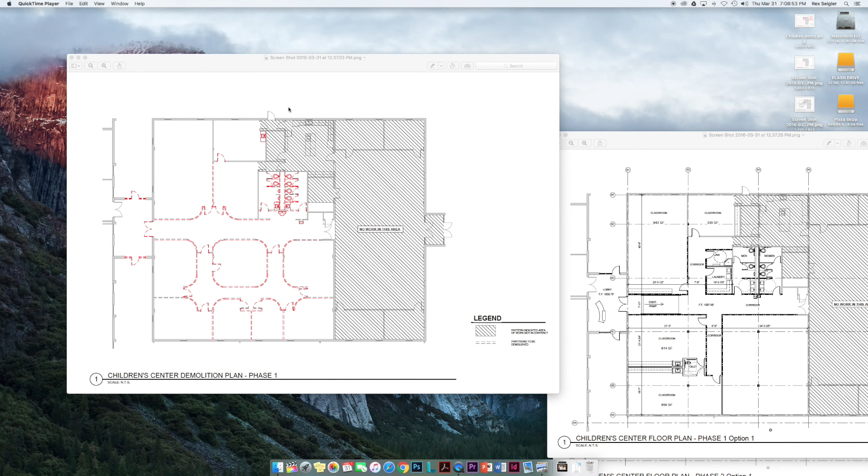They're as they are. Okay, so I'll bring this over, and this will show you—this plan shows what the intended floor plan is to look like.

Now, this area right here is the actual breezeway that is in between the two buildings right now, with this door providing out into the playground area, and this door comes to a sidewalk which comes along this side to the circular driveway and the sanctuary side.

So this is the planned entry point for the nursery after hours, or for Mother's Day Out and other events using the nursery, so that they can come up in the circular driveway and enter between the buildings and come in this place here for a secure checkpoint.

This is our existing ramp going down the corridor toward the gymnasium area. There will be some changes to the angle of the ramp, but with the new floor plan, you'll see this is a much larger room with squared off corners.

We'll have a short corridor going back this way, giving access to a janitor's closet, a laundry section area, and a smaller classroom in this area.

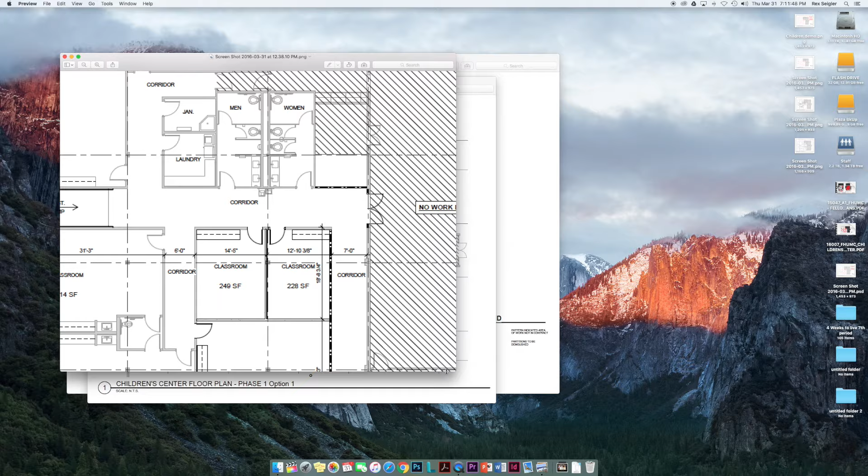And you'll see this document actually shows how that space is going to be used. Let me make this a little bit bigger. Guess that's not going to work. Try it anyway.

That space will be used to rough out two classrooms with a dividing wall and a larger classroom, and there will be a corridor along this wall to provide egress outside for emergencies, and to the driveway and access across to the sanctuary if needed.

But the actual exit point that is secure will be this point right over here. This will just be an emergency exit, as well as there will be emergency doors going through the gym this way. But this will be a secure point where people cannot come back through this way.

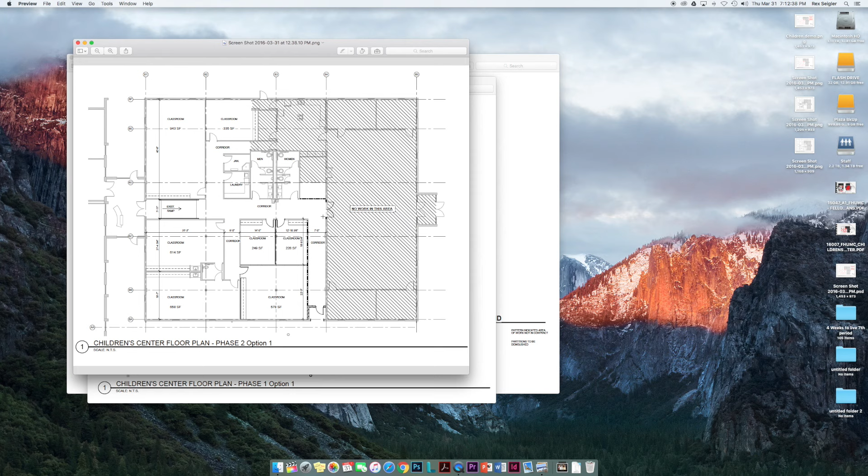Bringing in new members, bringing in young families, and also reaching out to multi-generational families. So I think from the standpoint of the improvements in the fellowship hall, that'll be a great way to fellowship and to reach those multiple generations of families. It's very important that that happens.

Proposed renovations to the fellowship hall will begin with some demolition on the 10th Street side. The stairs and doors will be removed, as well as the large storage room in the corner.

This will allow for construction of a ramp for accessibility to the room from the lobby area, which we now refer to as the parlor.

In that wall where the 3 doors were, 3 windows will be placed in the wall separating the old entryway and the fellowship hall. This will allow natural light to enter the room.

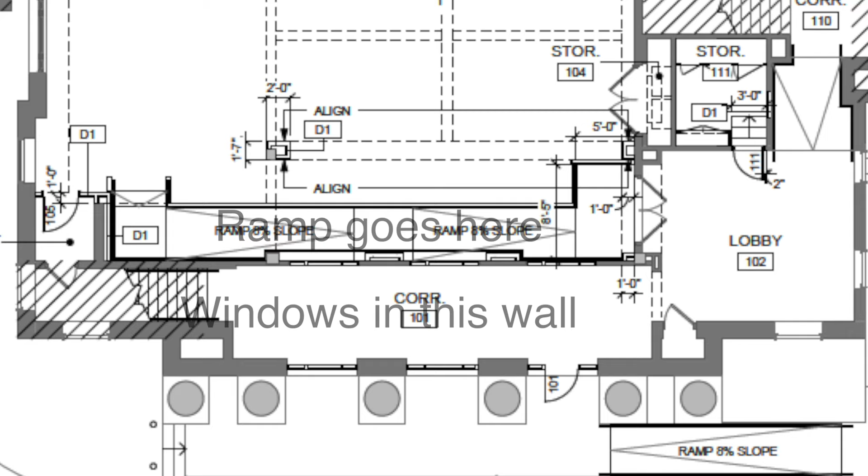The exterior doors between the columns will be removed and replaced with 2 windows and 1 large door for an emergency exit. This will improve the appearance on the outside and make it look like it's not an entrance.

We will also have to remove some stairs on the front steps to provide a ramp to the sidewalk level.

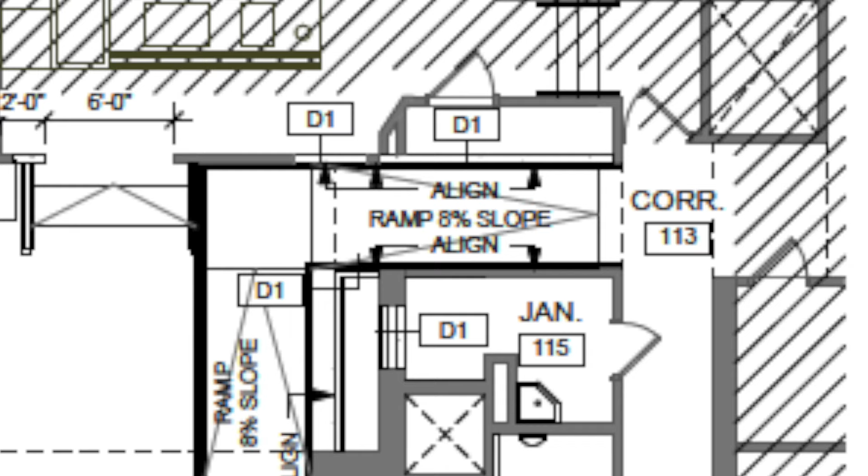Moving to the kitchen side of the fellowship hall, the current entry ramp and part of the kitchen ramp will have to be demolished to make room for a wider, longer ramp. Several other storage and mechanical spaces will have to be modified as well.

The doorways to the serving lines will have to be enlarged. Other sections of demolition would include creating an additional entry or exit into the Merle Anthony classroom and expanding the existing doorway to provide better access.

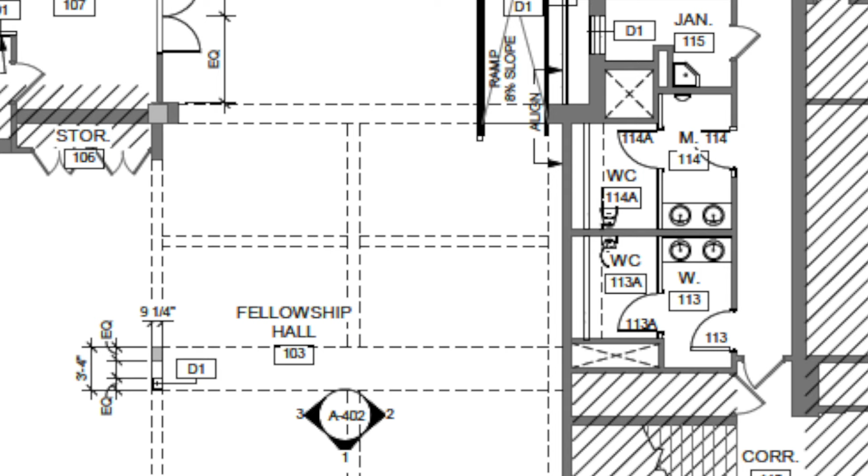The restrooms in the Fellowship Hall corridor will have to undergo major renovations to bring them up to code. And it is true that we will lose some stall space, but what we lose in space, we will gain in accessibility.

Also, cosmetic changes. The ceiling of the Fellowship Hall will be altered to have a level appearance instead of the various canted angles that are left over from the old sanctuary above.

There is an estimated $25,000 for new kitchen appliances. Although the kitchen itself is not presented at this time for a complete overhaul, the architects have consulted with a kitchen specialist, and they suggested that updated appliances would help the functionality of the space for many years ahead.

Breakfast at the Heights is entering its 10th year as an outreach ministry of Floral Heights United Methodist Church. For anyone not familiar with breakfast, what we do is offer a free hot meal of pancakes and bacon each Sunday morning to people in our church's neighborhood and the community at large. But I'd venture to say that most people are already familiar with breakfast because so many church members have volunteered to help make it happen.

Nearly every Sunday school class at Floral Heights, the choir, the Boy Scouts, the Wesley Foundation, and MSU have all helped volunteer and serve breakfast. It is truly a church-wide effort.

Breakfast has certainly grown over the past 10 years. While our basic menu of pancakes, bacon, juice, and coffee hasn't changed much, the number of people served down in the activities building has grown from a handful to 50 to 80 each week. Some of those coming have been attending for 3 to 5 years or even longer. And while breakfast is still a place to get a free meal, a safe place to get together with friends and socialize over a cup of coffee, and a warm, dry place to get out of the cold for those who may not have a roof over their heads, for many it has become something much more, a church home.

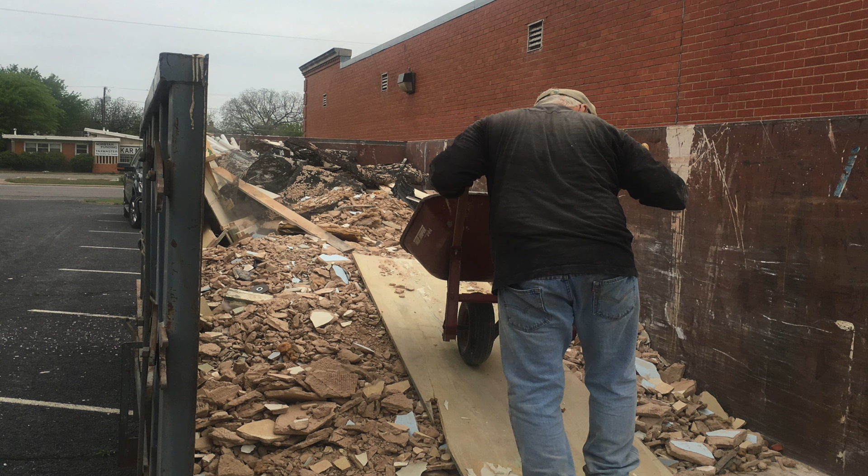For the past several weeks, we have called upon people to volunteer their time, talents, and especially labor to prepare the red brick building across the street from the church to become the new home for Breakfast at the Heights. If you have not seen the work that has been done over there, please do so. We have completely gutted the interior, torn out all the walls, ceiling, ductwork, and electrical fixtures. It has been a hard, dirty, but fun job.

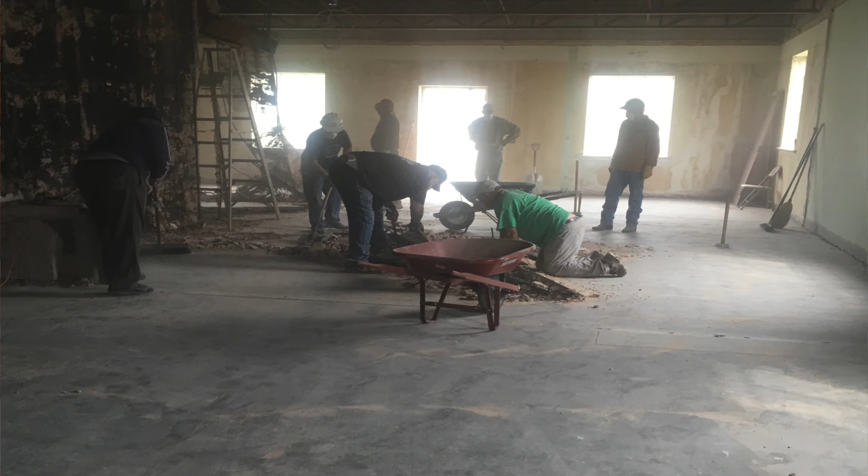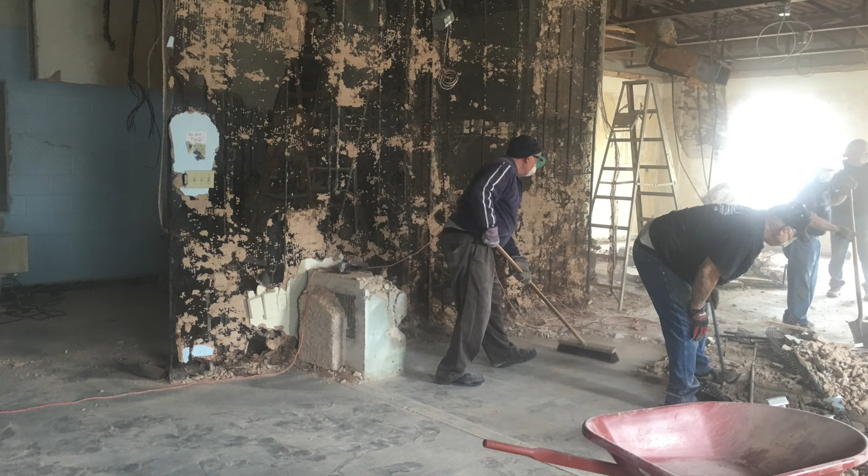Now that the volunteer demolition has been completed, and if the church provides funds for it through the passage of the building campaign, the next step will be for professional contractors to turn the building into not only a home for Breakfast at the Heights, but a multi-purpose facility that can be used for many groups throughout the church. It will have seating for nearly 100, a food preparation area, bathrooms, and hopefully even a shower.

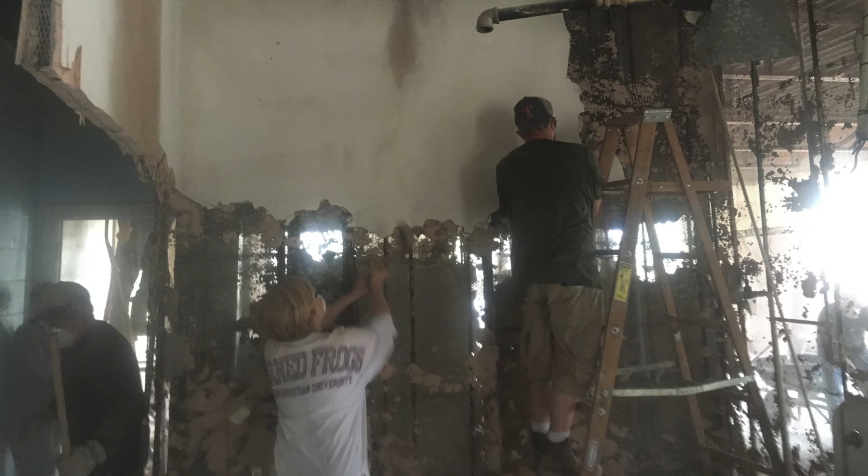It will be available to the Boy Scouts, youth groups, out-of-town groups that visit our church to work in the community, and groups within our church for their meetings and activities. If the building campaign passes, the red brick building will become a tremendous asset, not just for Breakfast at the Heights, but for all of Floral Heights.

Floral Heights Food Pantry was started by our church in 1985, and it has grown into the area's largest food pantry. We feed an average of 2,000 households each month. We are currently registering about 20 to 30 new applicants each week, which shows how fast our food pantry is growing. We have received our own 501c3 status and changed our name to Floral Heights Community Food Pantry.

The trustees gave us some land across the street for our new building, and we are in the process of looking for donations to be able to build this building. The building will cost around $300,000. We are hoping that our new pastor, Don Yeager, will bring us some fresh new ideas since he has been running the Gainesville Food Pantry for many, many years.

The church is also ready to make some changes, which includes remodeling of the fellowship hall and the kitchen, a coffee bar, and a new secured children's area. We are looking at a timeline of January 2017 to be in our new facility, as long as we have raised the money. We appreciate all of our church members for volunteering, donations, and the support and encouragement that comes our way.